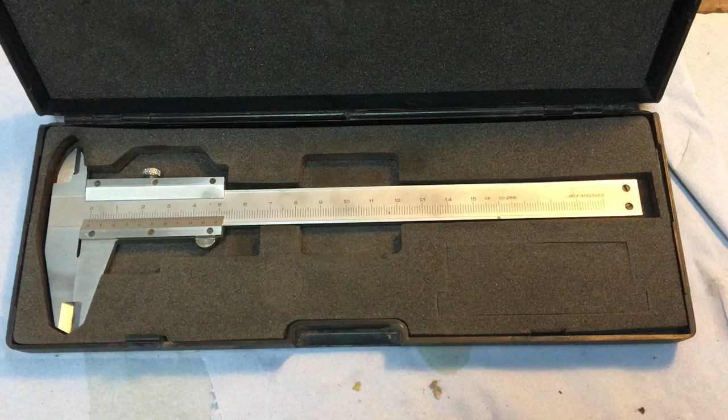What we've got in front of us is a vernier gauge. These have been around for donkey's years, used in engineering workshops for measurement. Now they're quite simple and complicated.

I'm just going to show you how you measure something, internal, external and depth, all with the same gauge, and then we'll explore how you actually calculate what you've just measured.

So there's some interesting points on them. These are the external points, which will measure the external diameter of something, or an external distance or thickness. These are the internal ones, so that you can measure the internal diameter of something. And on this end, a post sticks out as you adjust it, and that will help you measure the depth.

So let's have a look at a couple of things, and we'll explore how you use it, then we'll look at actually calculating the depth or the thickness or the internal diameter of what you've just measured.

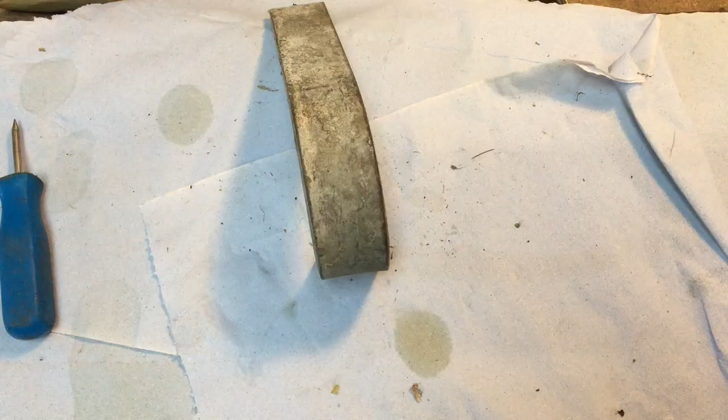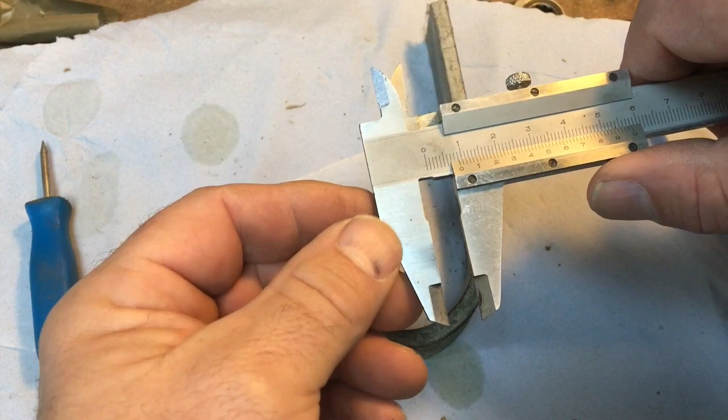Firstly, what we'll do is measure the thickness of something, so we can measure how thick this bar is. There's several controls on the gauge: this thumb screw here which locks it, and this is the operating thumb lever. So you move it backwards and forwards like that. So what we'll do is measure the thickness like this.

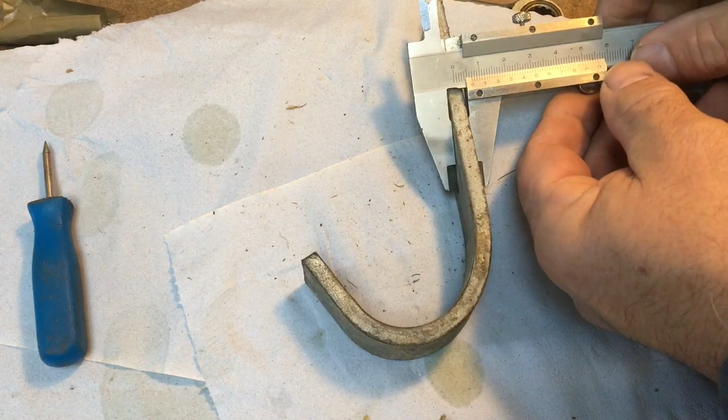Then we'll lock it off. Then we'll need to read off on the gauge.

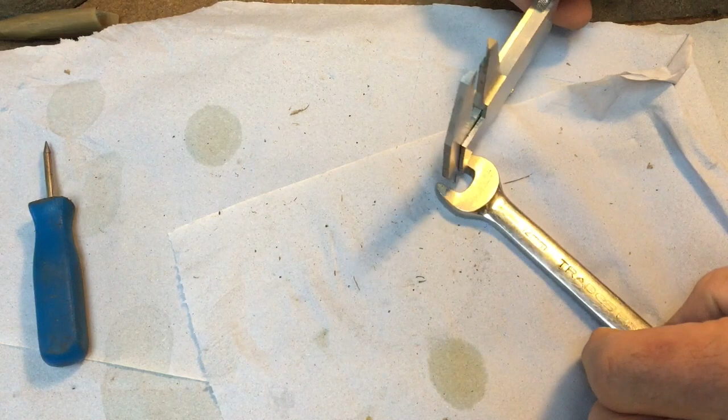Now, if we're looking at the internal diameter of something, this is a good example. We'll release the thumb screw so that it slides easily up and down. You see how these blades are the internal ones here. So we'll measure, we've got the internal diameter, we'll lock it off.

Now the other end of the gauge is the post I was telling you about. Let's find something we can measure the depth of.

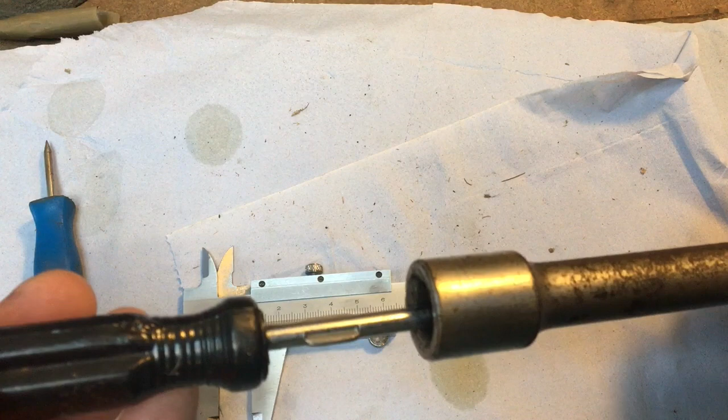Now in this socket wrench extension there's a hole. If we wanted to know exactly how deep that was, we could just roughly get a guide like that, and then measure it, but that's not very accurate. So we can use the vernier gauge.

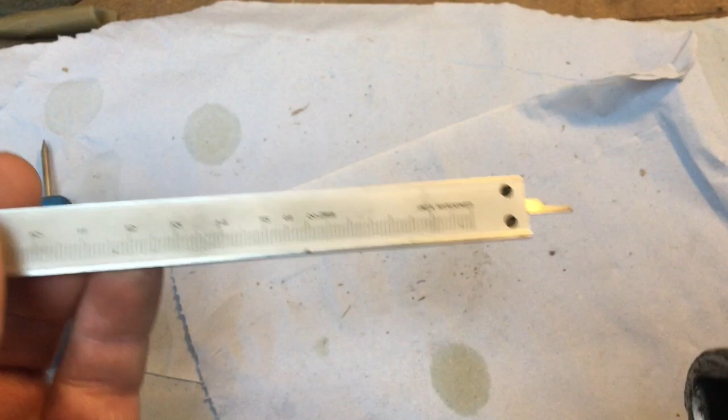First thing we do is release the locking wheel, open them up. See it sliding in? And then lock it off. So that there, between here and the tip of that point, is the distance of the depth of that hole in that tool.

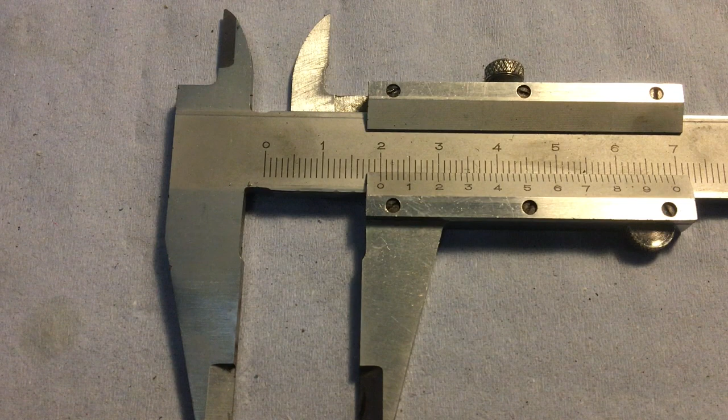Now move on to the more interesting point of how you read it. So let's have a look at the gauge in more detail. We just measured the depth of the hole in the tool, and you can see here we take the reading by using the naught, and that's against 2 centimetres, 20 millimetres.

And the next stage is to measure something that isn't exactly a centimetre, it'll be part of a centimetre. Now we've measured something that's slightly more than 2 centimetres. It's 2 centimetres, 20 millimetres, 21, 22, 23 exactly.

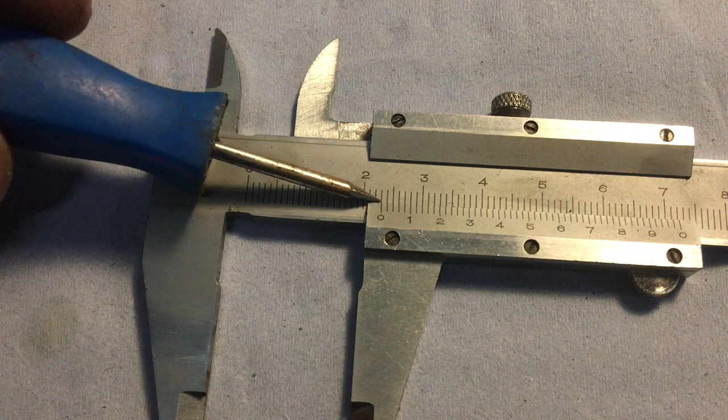And the next stage is to measure something that is part of a millimetre. So I've adjusted the gauge. Let's look carefully. This time it's 20 millimetres, 21, 22, 23 and a bit. So we're looking for an exact match, and the exact match is here. So that's 21, 22, 23, 0.1, 0.2, 0.3, 0.4, 0.5.

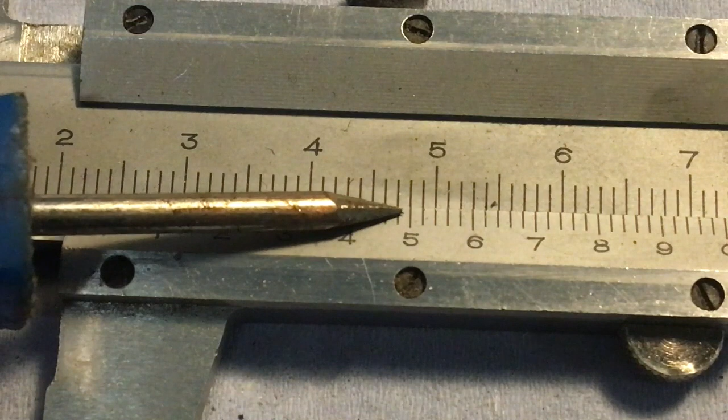Now the next stage is to measure something that isn't a millimetre perfect. So I've adjusted it again, and now what we're looking for is the exact match. Each of these 1, 2, 3, 4, 5, 6, 7, etc. is the first decimal place.

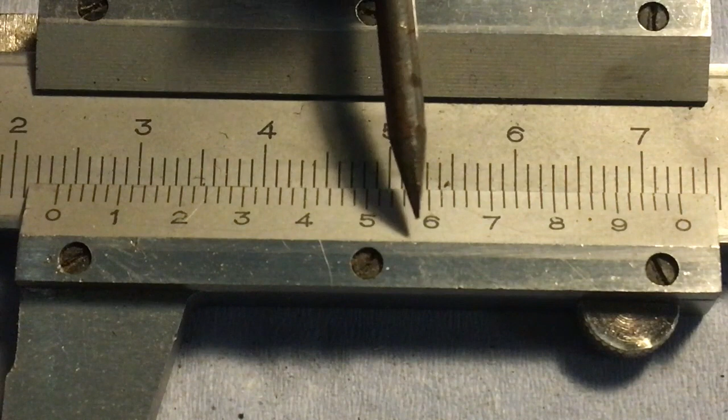And these individual markings here are, each one is 0.02 of a millimetre. So we've got 23, nearly 24, to 23.1, 0.2, 0.3, 0.4, 0.5, 0.6, 0.7. So 23.7 plus 0.02 plus 0.04. So 23.74. That's how we measure using those gauges.

And to finish up, I've done one more. So it's 21, 22, 23, 24 and a little bit. So 24.1, 24.2, 24.3, 24.4, 24.4, 2 or 4. You decide. I think it's 24.4.

0.42, 0.44, 0.44. That's the exact match. So 24, 21, 22, 23, 24 and a little bit. And that little bit is 24.1, 24.2, 24.3, 24.4, 24.42, 24.44.

So, it's easy and complicated. Hope you got that. See you next time.